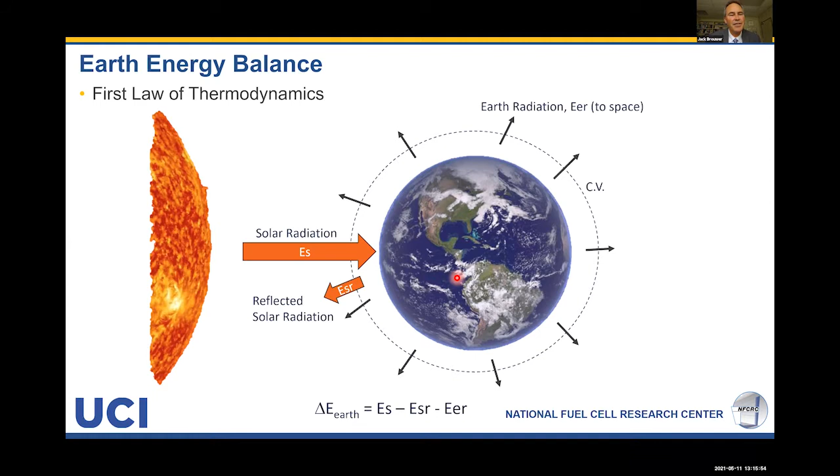I rather want you to think about something else, for the moment at least. And that is to think about our primary energy sources on Earth, which, except for nuclear, all come from the power of the sun. As a matter of fact, the fossil fuels that we use have been naturally produced on Earth from dead plant and animal life, heat and pressure over millions to hundreds of millions of years to produce these fossil fuels, which are precious and high energy density and enable us to, with very little effort, engender incredible things like flight over thousands of miles.

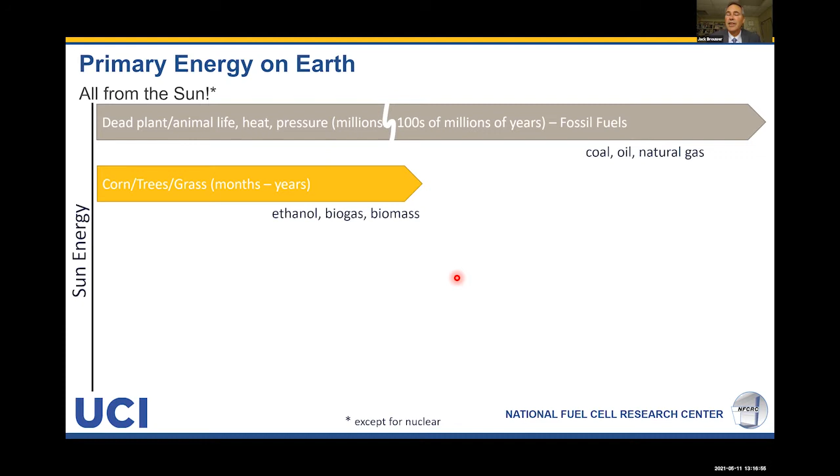But this is such a long time scale that we must draw a hash through this, because every other form of primary energy on Earth is so much more quickly replenished. And you think about things like biomass and biogas, things like corn, trees, and grass, which only take months to years for the power of the sun to naturally replenish them on Earth.

Or hydropower, again, power of the sun that evaporates the waters, forms clouds, the clouds move over the land, and the clouds rain out water into lakes, and we can use that as a form of energy or energy storage. Wind.

Wind is driven also by the power of the sun, creating temperature gradients that lead to pressure gradients that lead to wind forces. And then we have solar power, which the instant you use a unit of it up, another instant comes right back at you.

And so you can see that the primary energy on Earth all comes from the sun. So I want to suggest one partial definition of sustainability is to consider requiring conversion of these primary energy resources at the same rate at which they are naturally replenished on Earth, without externalities.

So I suggest if we started using much, much less of these fossil fuels, it could be sustainable. But this is a very long time scale. Inevitably, we must go to these more quickly replenished forms of primary energy.

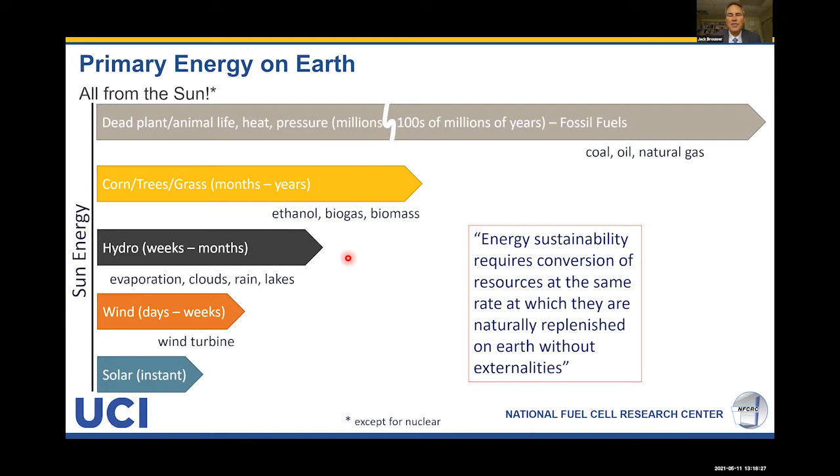But if you think about this, our current practices are so obviously not sustainable, borrowing from future generations, using these precious fossil resources almost as a delta function in the course of human history. It's quite obviously not sustainable.

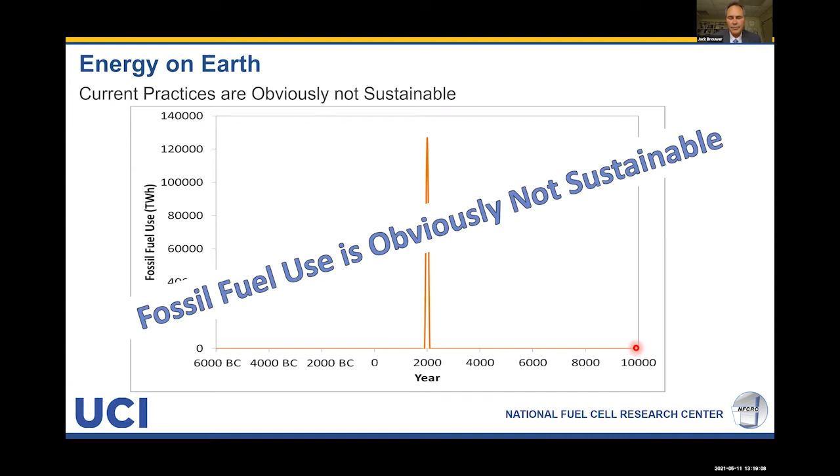In addition, we have externalities. It's not just that it's not sustainable from an energy conservation perspective, but the energy conversion technologies that have improved our quality of life—improving our healthcare, improving our transport, giving us freedom of mobility all around the world—these same technologies have unfortunately also been the most significant cause of environmental and geopolitical problems.

These are the things I want to call externalities today, although I hope we can get away from that and always consider these things when we look toward energy conversion in the future.

One of those, which has been historically a major point of concern from policymakers and the general public, has been criteria pollutant emissions. Most everyone from every political stripe cares about pollution. We don't want it. It's what leads to very serious air quality and health consequences, even in the most sophisticated and wealthy of economies. You see this everywhere around the world, even with very strict attention to pollution and even with all the money you want to spend.

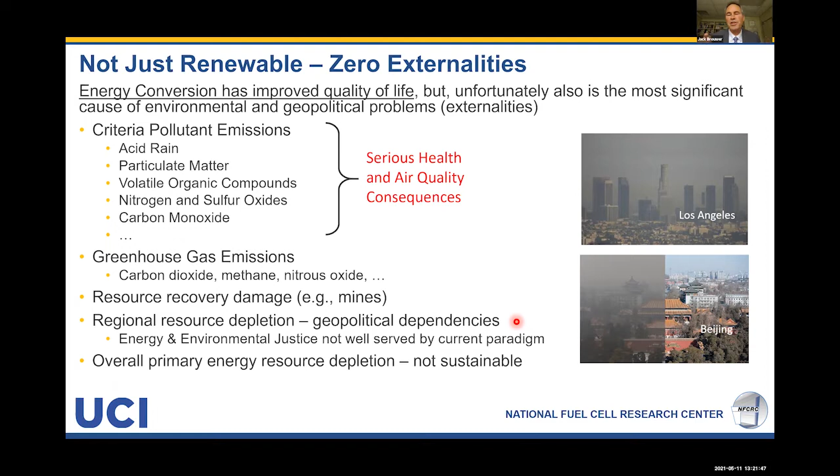We have additional externalities that many people aren't too concerned about today, but I am, and I think all of us should be: the resource recovery damage that occurs in things like mines, the regional resource depletion—the fossil resources we depend upon are not equally dispersed among nations or regions. This leads to geopolitical dependencies and energy environmental justice issues that are not well served by our current paradigm. I suggest the renewable paradigm can be better in this regard. And we have overall primary energy resource depletion, that delta function I showed earlier.

So the good news is that solar and wind power and battery costs have dramatically fallen over recent decades. And this is not by accident. It has been due to some of the policies that have supported their adoption over time, which now have led to their lower cost than other forms of energy in many jurisdictions.

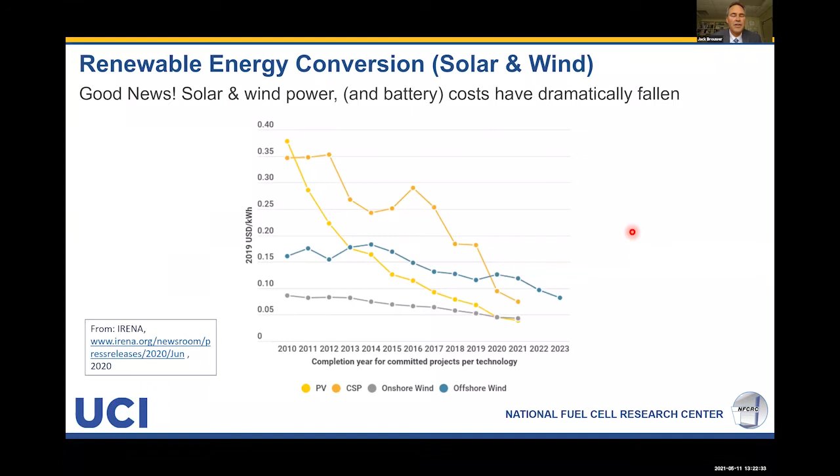And so this is a wonderful thing, something that changes our thinking a little bit, enabling us to think that we can, in the end, get our primary energy from sources that are more rapidly replaced and replenished naturally on Earth.

And this has led me and many others, maybe many of you, and the general public to think that we can get 100% of our energy from renewables, especially in power generation. And then if we would just electrify all the end uses and use batteries to handle the intermittency on the grid, and for some end uses, that maybe that's the whole solution.

We see our neighbor adopting solar on the roof, or we adopt solar and a battery in our garage and we have a battery electric vehicle. It's starting to look like, hey, if we just all did that, wouldn't that be enough?

And then we have some people who argue that hydrogen and fuel cells should not be adopted. They argue that it shouldn't be because it's mostly made from fossil fuels today, natural gas. They also argue that making hydrogen from water and electricity is less efficient than charging a battery, or that making electricity from hydrogen in a fuel cell is less efficient than a battery, so the round trip efficiency is lower, and that hydrogen is difficult to store and move around in society.

These arguments are being made by a lot of people, and by some who are extremely influential, like Elon Musk. I highly admire him and most of his practices and businesses, and I hope we have many more of them. But I want to suggest that even though I agree with most of this, he and others are being subtly untruthful and not telling the whole story when they argue against hydrogen and fuel cells.

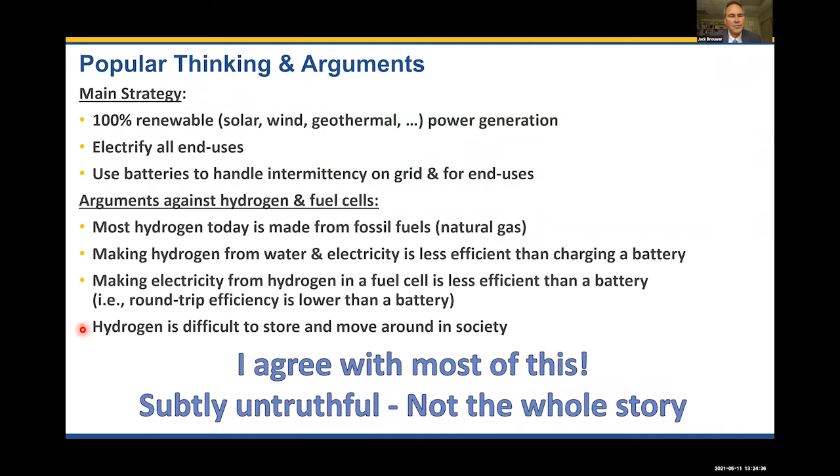That is because we cannot electrify all end uses. We can also use batteries, and we should use them extensively to handle intermittency on the grid, but they can't handle all the intermittency, only some of it. And not all end uses are amenable to batteries.

In addition, round-trip efficiency is greater for a battery unless you want to store energy for a long period of time. Then we can have higher efficiency with hydrogen energy storage. Hydrogen is difficult to store and move around in society, but that's compared to fossil fuels. It's easier than batteries.

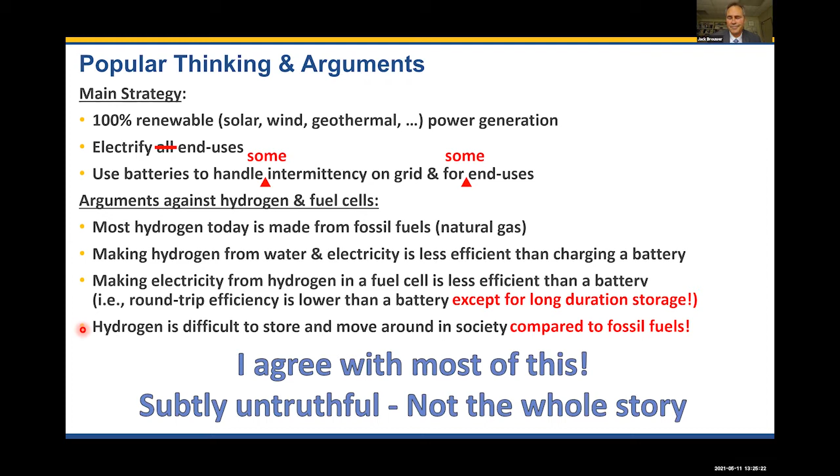I'd like to go into a little bit of our research that we have accomplished to see where and how we might best need and use hydrogen to enable this 100% renewable and zero emissions future.

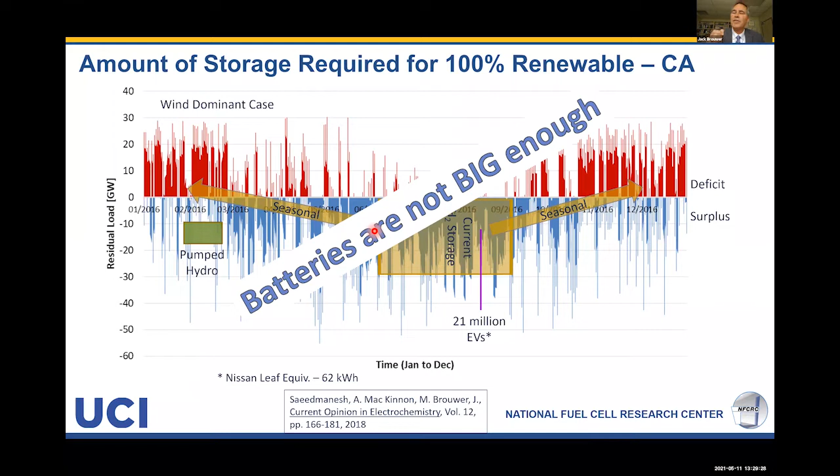Batteries, I suggest, can be used for short duration storage, but aren't sufficient. They aren't big enough for this requirement.

We did a similar simulation for the entire world. Instead of just California, we looked at the dynamics of sun and wind power in all the regions of the world, focusing on various continents, attributing a certain solar and wind contribution to each region. In Africa, it was mostly solar. In Asia, it's a 50-50 mix. In Oceania, 50-50 mix. In Europe, mostly wind. Anyways, we did an annual simulation of all the dynamics of sun and wind power.

We figured out that to make it through the year, we would need more than 20 terawatt hours, 20,000 terawatt hours of energy storage. This is a massive amount.

And if you ever tried to meet that energy storage with only the very best batteries that we make today, lithium-ion batteries, it would require more than 3,000 megatons of lithium and more than 25,800 megatons of cobalt.

From the US Geological Survey, we know that we only have 53 megatons of lithium resources all around the world, and only 25 megatons of cobalt, unless we want to mine the ocean floor, then we have another 120 megatons. But these are orders of magnitude less than we need if we were to make just one lithium-ion battery to store this amount of renewable energy.

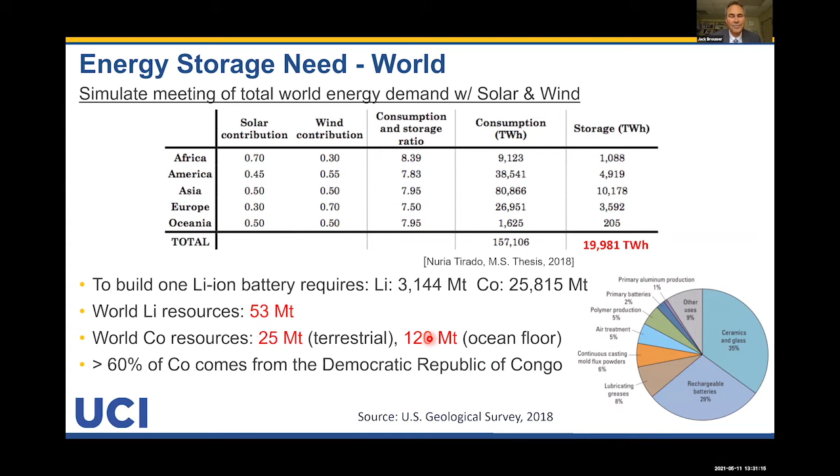So I want to suggest that lithium and cobalt, and these beautiful lithium-ion batteries, should be used where they make more sense: in our electronic devices, in cars, and in various applications that require smaller amounts and shorter duration energy storage.

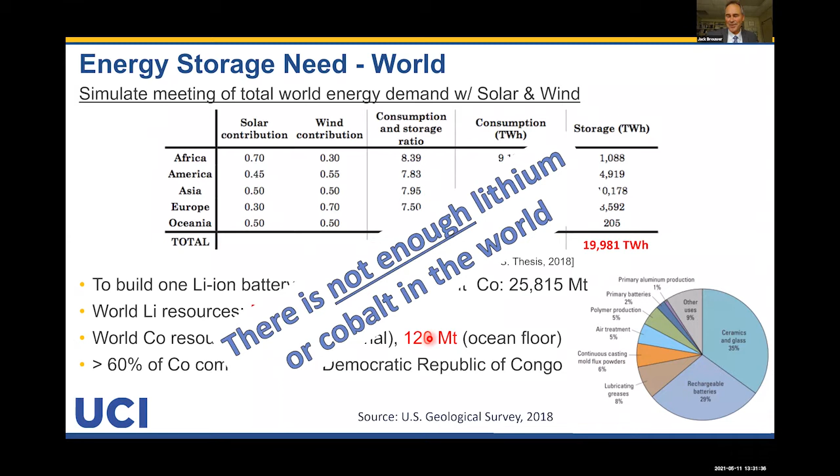So capacity factor is the number of hours that the battery is either being charged or discharged divided by the total number of hours. If you charge a battery and discharge it every day, it has a high capacity factor. If you charge it one day, leave it for a week, and then discharge it, it has a low capacity factor.

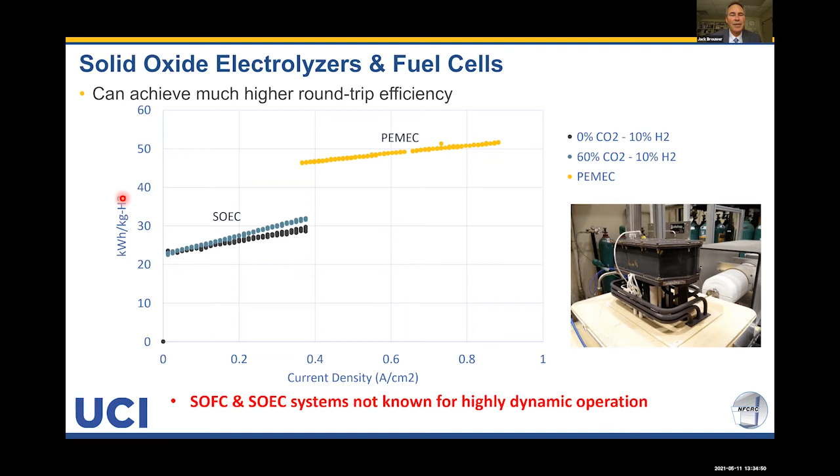However, these systems are not known for their highly dynamic operation, which is something that I've been emphasizing to this point. I want to spend a little bit of time talking about that as we go forward.

We have been able to, with funding from so many different entities and with awesome postdoctoral researchers and graduate students, develop this idea for building dynamic models of all types of fuel cells, electrolyzers, battery energy storage systems. The key simplification I suggest for enabling us to do these dynamic simulations over long periods of time, like a year, is to have limited geometric resolution.

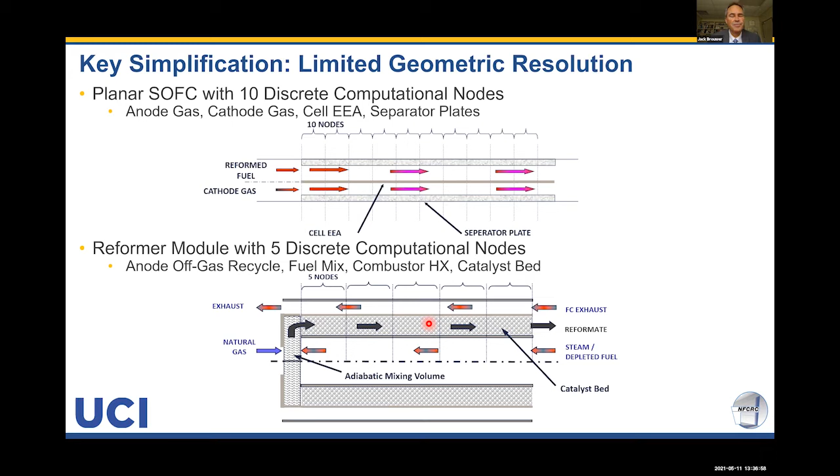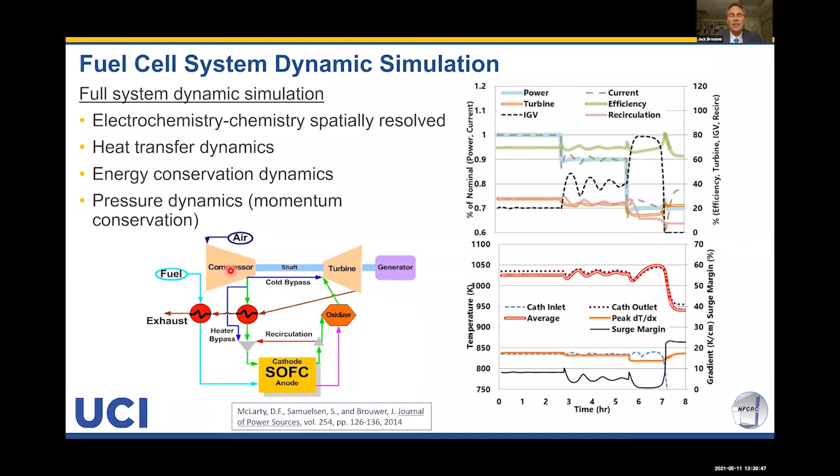We can not only simulate solid oxide fuel cells, but also solid oxide electrolysis systems. These have very interesting thermodynamics that I want to spend just one moment talking about, because one of the reasons that you can get higher electrical efficiency with solid oxide electrolysis is associated just with the simple thermodynamics.

But you also have these interesting things that affect the dynamics. We can operate at the thermoneutral voltage, often called VTN, where there is no net heating nor any net cooling required. In other words, the overpotential or electrochemical losses are applied to this heat demand exactly to balance out the heat required for the given current density.

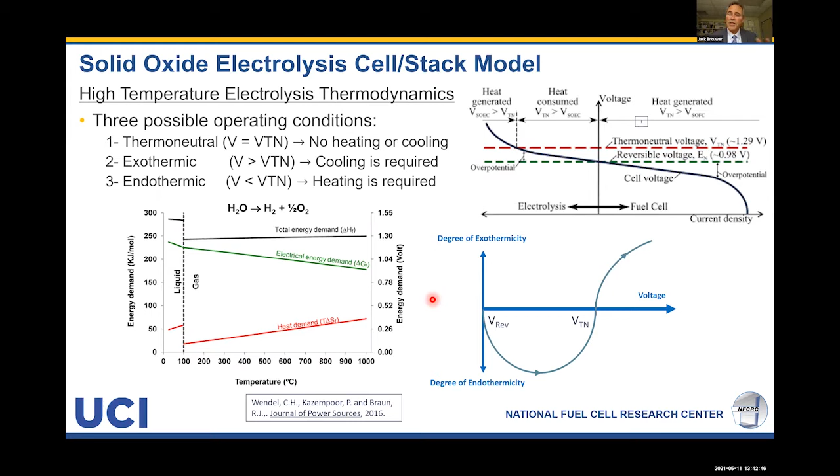And then, after we cross the thermoneutral voltage, we go into an exothermic region. Now interestingly, most existing electrolysis systems, since they have higher activation losses, don't have this dynamic associated with them. They tend to have high electrochemical losses, putting them above the thermoneutral voltage immediately when they go into electrolysis mode. So with this in mind, let's see if we can actually model solid oxide electrolysis cells and stacks.

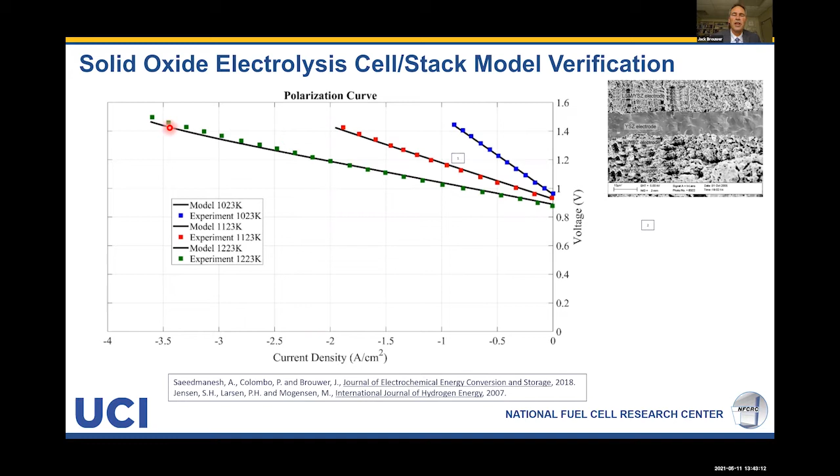We've verified that our model can do well against literature data for various temperature conditions, and you can see here our model compared to literature data for different temperatures. As you would expect, at higher temperatures you have lower ohmic losses, and as a result you have a flatter polarization curve.

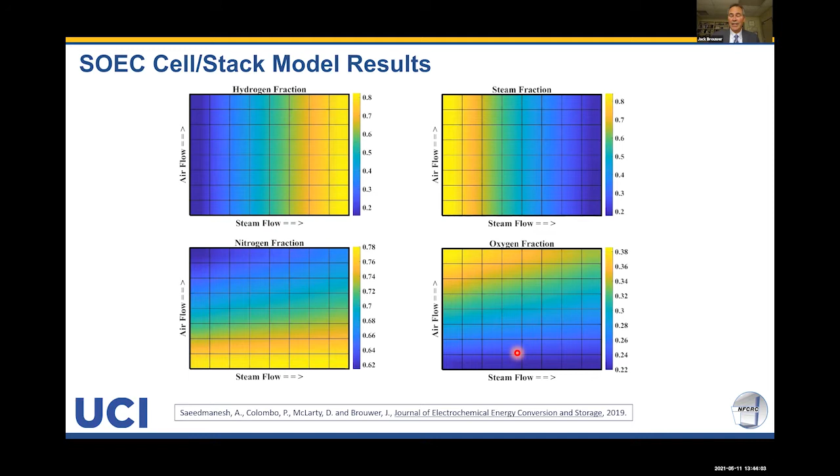We also can resolve, very importantly, the species concentrations, as you're seeing here, and the temperature distribution for all of these systems as they are operating dynamically. And then we can put a system around that, we can wrap a system around that solid oxide electrolysis cell, and we can simulate those too, sometimes with spatial resolution, sometimes not.

So for example, our ejector and valve models tend to be not dynamic, but rather simple bulk models. But for the heat exchangers, the air blower, and all of those systems that might have important dynamics, we resolve all of those.

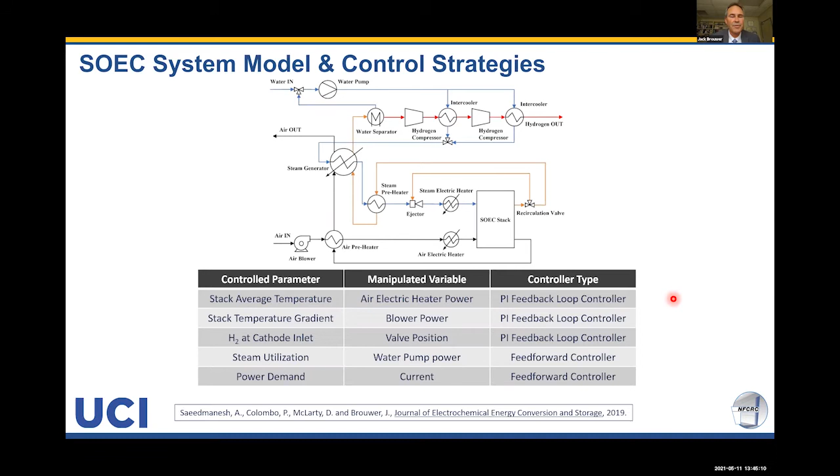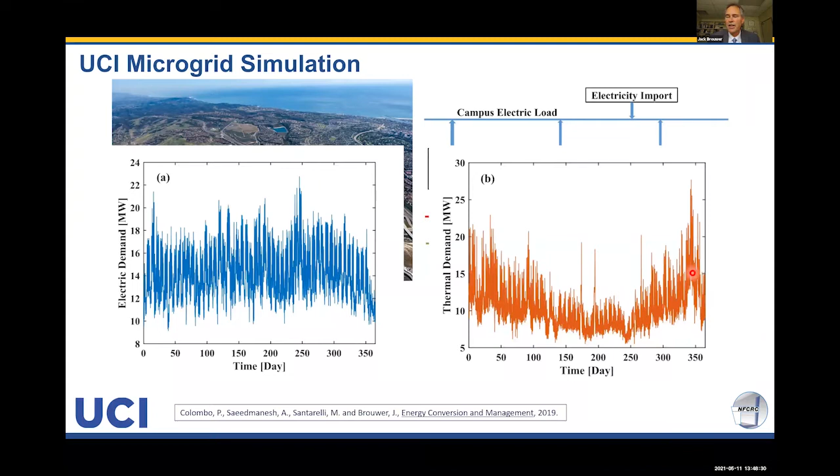Now, curtailment's not necessarily a bad thing. It's one of the cheapest ways to actually get a higher renewable percentage and just toss a little bit of the renewable energy away. But as we add more and more solar and wind power onto the grid, we're going to be increasingly forced to store that renewable electricity.

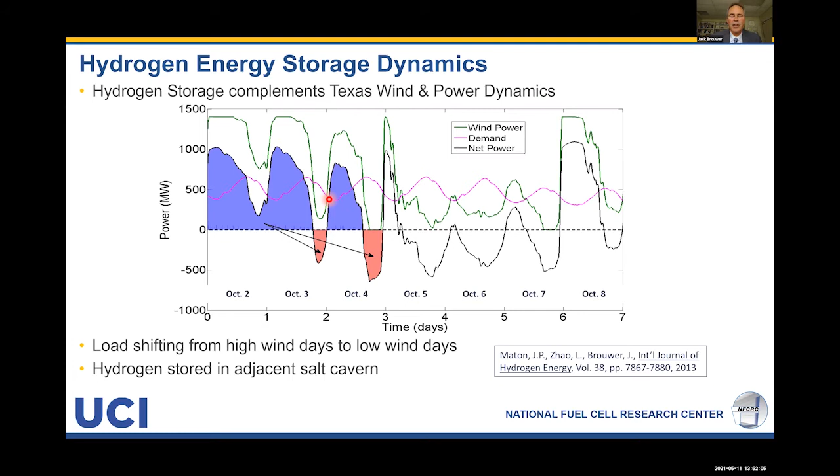Now, when we did this, there were no operating hydrogen storage salt caverns, but now there are 2 currently in operation in Texas, and they're proving that this is a safe and very effective way to store renewable hydrogen. But what if we don't have a salt cavern?

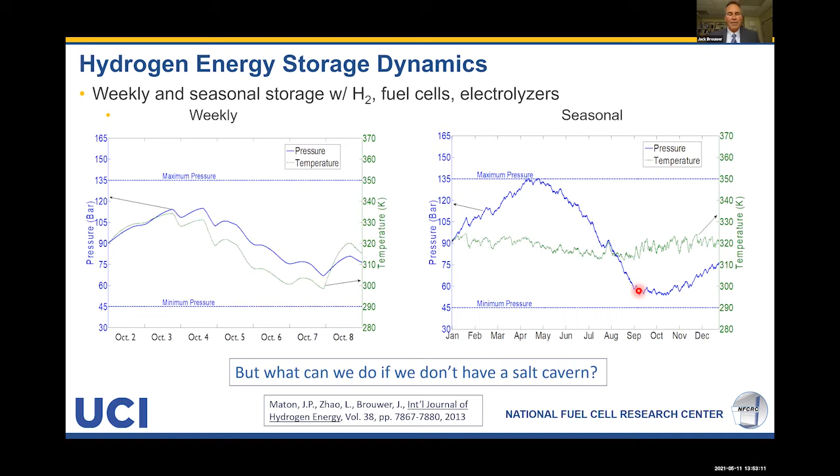Well, in California, we don't have one. But I suggest we could use the natural gas system, another underground storage resource that could not only provide that storage, but also deliver that renewable energy content, and it can do so with very high reliability.

The Gas Technology Institute, very close by to UIUC—well, Chicago is pretty nearby—has estimated 99.999% available gas delivery to customers. This makes it a very interesting resource for our renewable energy future.

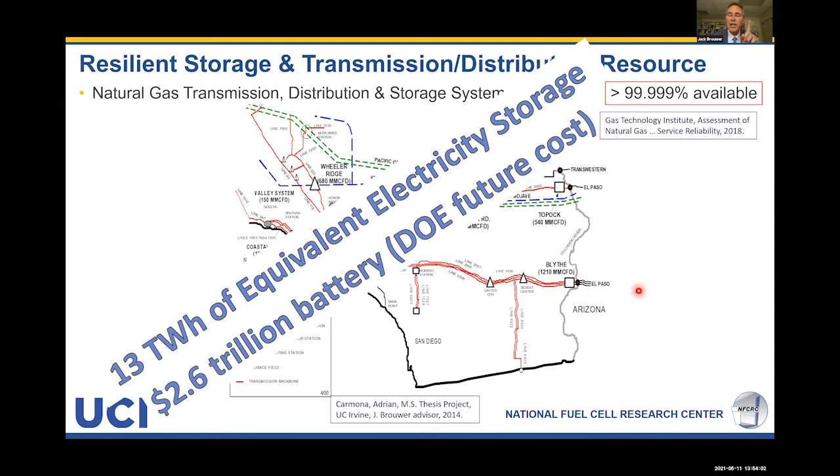It would provide, just in Southern California, 13 terawatt hours of equivalent electricity storage. That's $2.6 trillion value with regard to DOE future battery costs. Even if we just put 5% hydrogen into the natural gas system, it would be $130 billion at future battery costs. Now, these numbers are so big, I want to relate them to something we understand a little better.

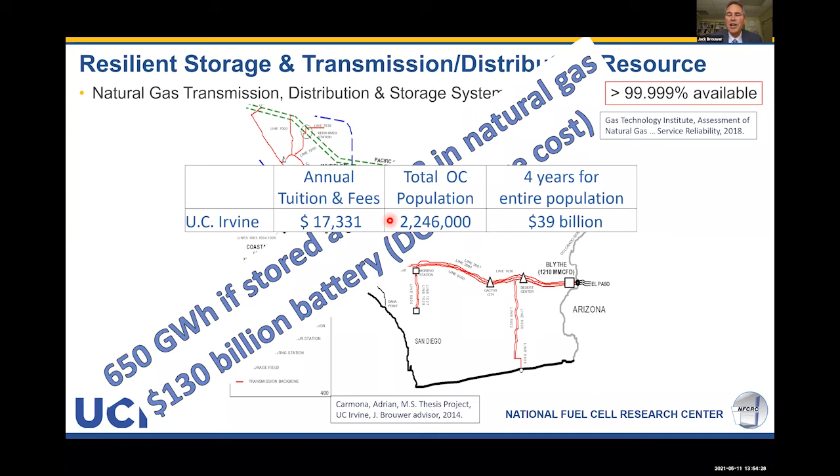How about UC Irvine tuition and fees? We could send the entire population of Orange County, every man, woman, and child, to 4 years at UCI for only $39 billion. We could make all University of California schools free for 4 years for the entire UC population for only $4.7 billion. The interest alone off of this massive energy storage system's value could make all UC schools free forever.

We've got to realize how big this resource is and why it will be so valuable to our energy future. It's been proven resilient under all sorts of circumstances: blackouts, winter storms, hurricanes, earthquakes, Japanese super typhoons, the Napa fire—all kinds of fuel cell and gas delivery underground circumstances. It's such a massive resource.

I wanted to have this idea in your head. Think about this, because we could first mix hydrogen up to a certain percentage into this system. This isn't such a great thing with regard to decarbonization of the gas system itself, because we can only go up to 5 to 20%. The biggest reason we want to do this is so we can add more renewables to the electric grid. That's why we want to do it at a certain percentage.

And then I think we've got to piecewise convert it to pure hydrogen or a renewable hydrogen derivative. I asked one of my PhD students to think about, hey, what if we put solar in the desert here and didn't build any transmission lines? We just wanted to use the gas system to move that energy. This area shown is 20 miles by 20 miles.

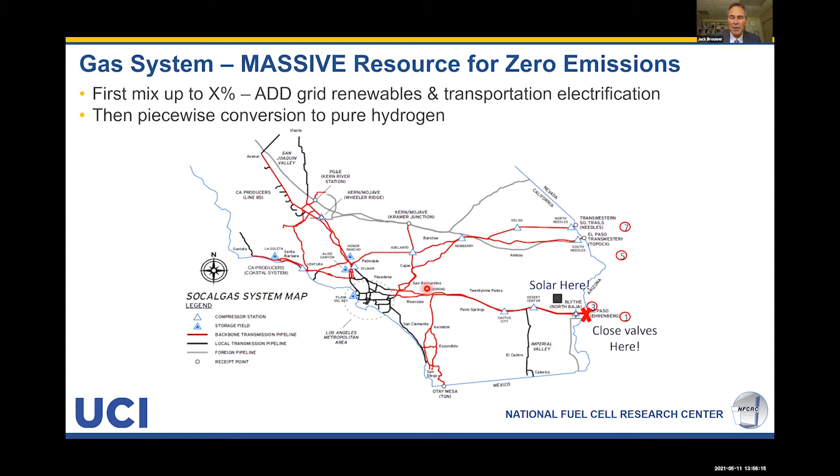And just this one project could produce 40% of all of our electricity. And it does the transmission and distribution for us as well. This is pretty remarkable to think about, right? One 20 by 20 mile square project, just using the gas system for hydrogen, takes California from its current 35% renewable to 75% renewable.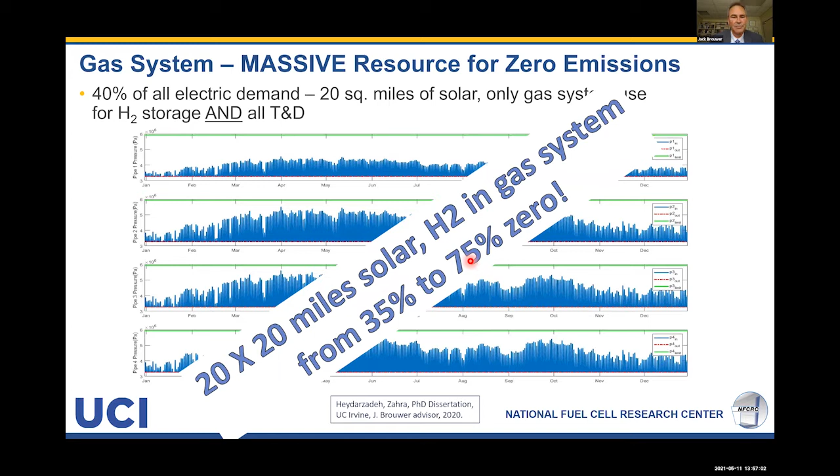I want to end pretty soon here with why I think we need hydrogen. And I want to suggest I'm not the only person that knows this. I was very fortunate to work with a whole group of amazing scientists and engineers led by my close colleague, Steve Davis, to investigate completely zero emissions energy systems of the future. You can see there's a lot of things that are going to be required, not just electrification and batteries and sun and wind power. We have chemicals and hydrogen, and we need something to make ammonia, to fly, and to make cement and steel and reliable electricity.

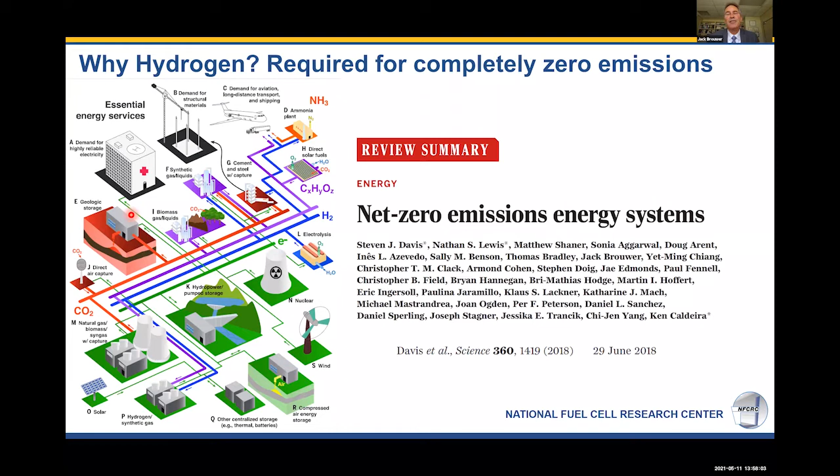These kinds of things are increasingly being recognized as possibly requiring hydrogen for achieving completely zero emissions. Especially in the transport sectors, there are some things where anything that requires rapid fueling, long range, or large payload is going to need a zero emissions fuel. Batteries don't do well in these circumstances. Hydrogen and its derivatives may.

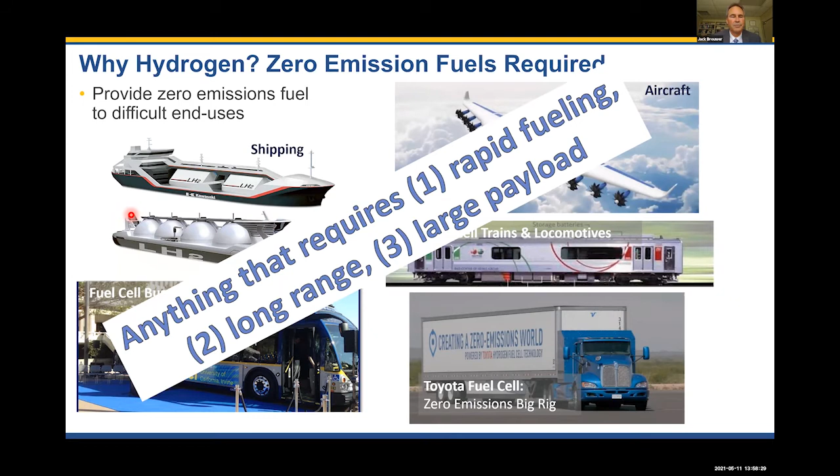Hydrogen is also required for industry. Many applications for heat or feedstock cannot be electrified. You look at things like steel making, cement production, plastics, ammonia and fertilizer production, computer chip manufacturing, pharmaceuticals, and other things will require something like hydrogen and its derivatives to make them zero emissions.

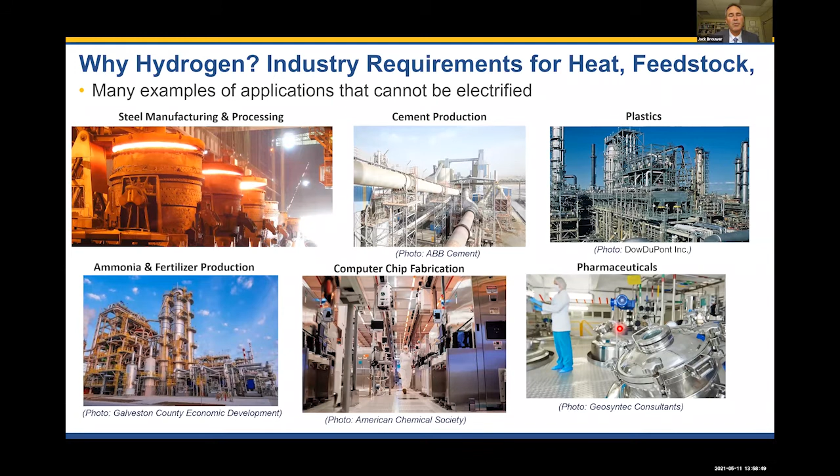Okay, I'm going to end with just 2 Gedanken experiments very quickly—thought experiments, after Einstein's naming of such. You just think about something you'd like to have happen in the future and then do some high-level analysis of that. One of those analyses I'd like you to think about is: can we ever make the LA Long Beach port complex completely zero emissions?

There are 2 technologies people are suggesting for this purpose. One is battery energy storage systems, shown in the red data on this plot. The other is hydrogen, with gaseous shown in green and liquid hydrogen options in blue. What I'm showing here is the percentage of original cargo space and net tonnage on ships of various sizes. TEU refers to the 20-foot equivalent units—a container size typically used for the size class of ships.

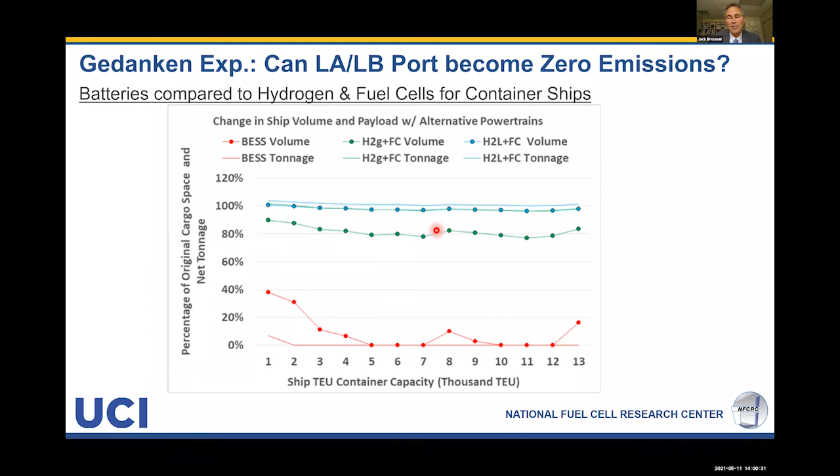What you can see here, it's pretty obvious that hydrogen options, especially the liquid hydrogen options, can almost retain 100% of the tonnage and volume. Whereas battery electric energy storage systems, at best, can only support 40% of the original volume, and only about 8% in the smallest size classes of these ships. Of course, with gaseous hydrogen storage, we lose almost 20% of the volume here because that takes up a lot more volume compared to diesel.

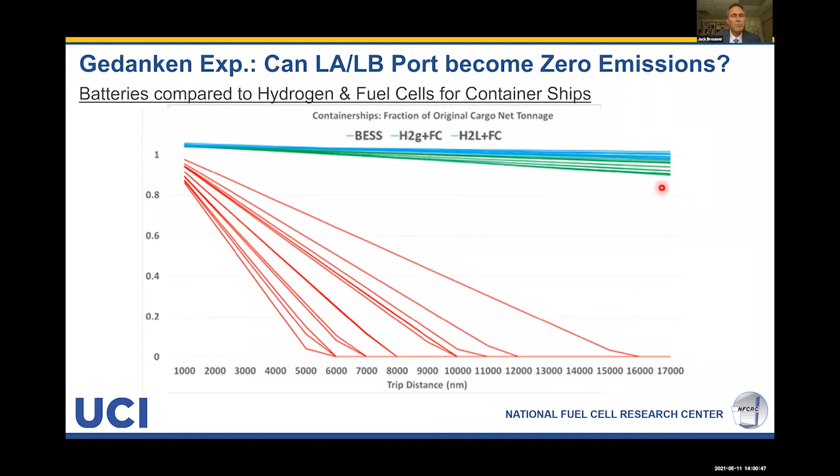And we know that these hydrogen options can go long distances. So you can see here, 17,000 nautical miles, and they still can carry between 100% and 90% of the original cargo, but the battery energy storage systems can't make it over these distances.

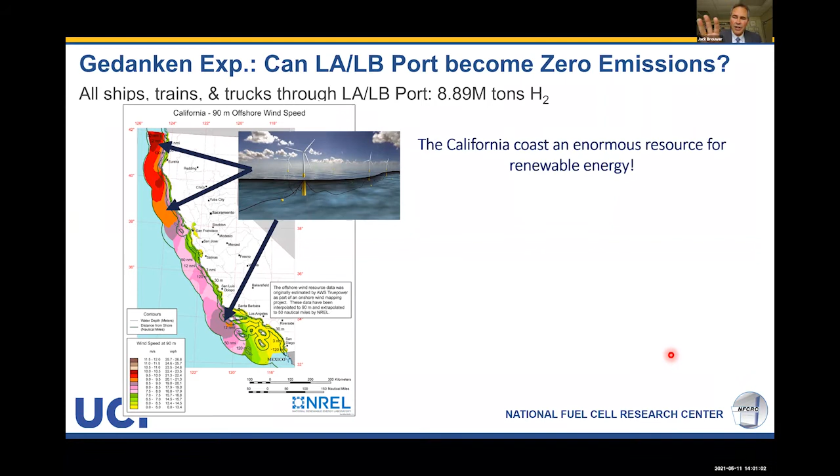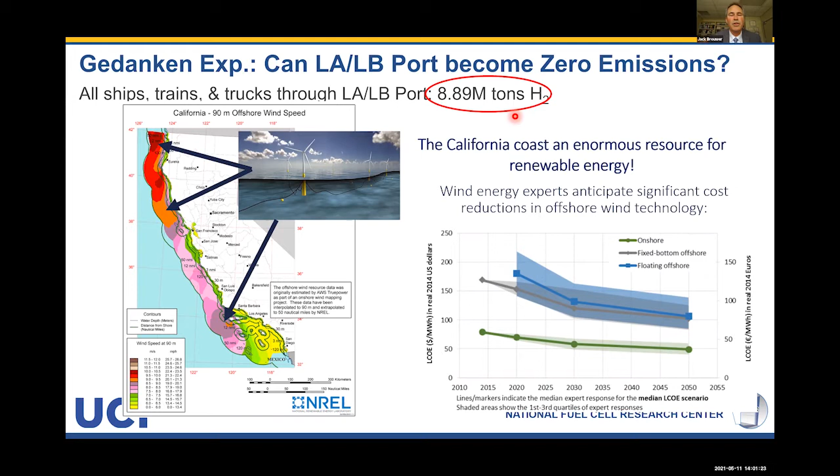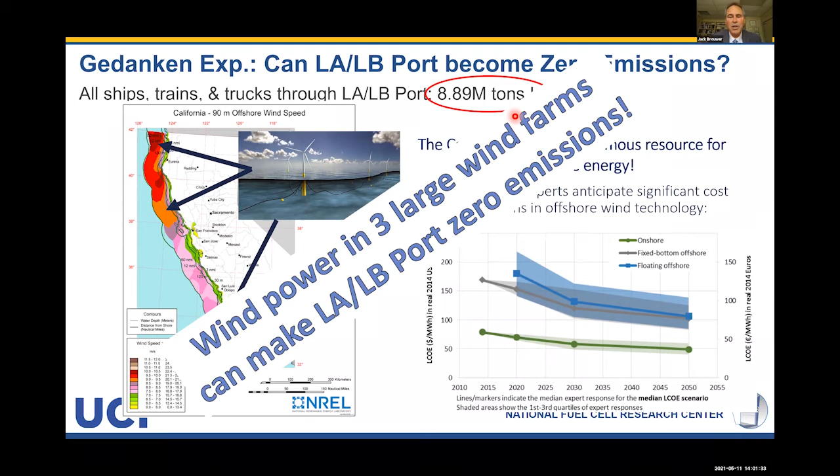And then we wonder, can we make all that hydrogen? So we've looked at various options for making all this hydrogen, and we simulated just three offshore wind platforms. With just those 3 offshore wind platforms, we can make 8.9 million tons per year of this renewable hydrogen. This would enable us to decarbonize all the ships going into the port, all the trucks going into the port, and all the trains going in and out of the port, and to electrify the short range options. Just wind power in 3 large wind farms can make the entire port complex of LA Long Beach zero emissions. How about another Gedanken experiment?

We've been fortunate to work with Microsoft over many years to think about how we can make data centers zero emissions. We've simulated cases of battery energy storage, power to gas complementing solar and wind, or even cases that make hydrogen out of all the renewable power and use fuel cells directly to power all of the servers. We've looked at many different locations.

We're accounting for self-discharge and round trip efficiency for the battery energy storage systems too. We can optimize this for various things. We can optimize for the most data going directly to the data center, and get 81% - that's pretty good. With a 50-50 mix of wind and solar, we could also minimize the storage amount required, which would need more solar and less wind. We can have the lowest energy capacity installed, which would require mostly wind in this particular Wyoming location.

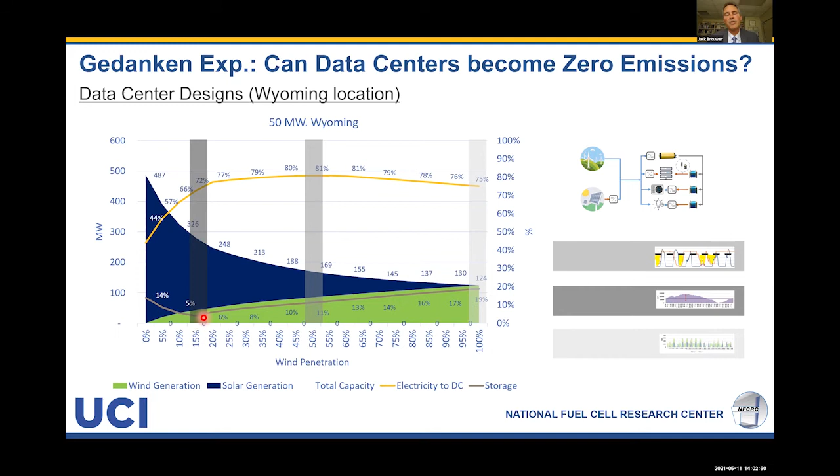We've also done techno-economic analysis of these cases, and every single case we've simulated so far, even accounting for all the costs of liquefaction, storage, and boil-off losses, has led to a substantially lower cost of energy going to the data center in a hydrogen storage case compared to a battery energy storage case. This is primarily because we require seasonal storage to make it reliable for the whole year, and that leads to a huge battery cost, even though we can install less solar and wind because it's more efficient.

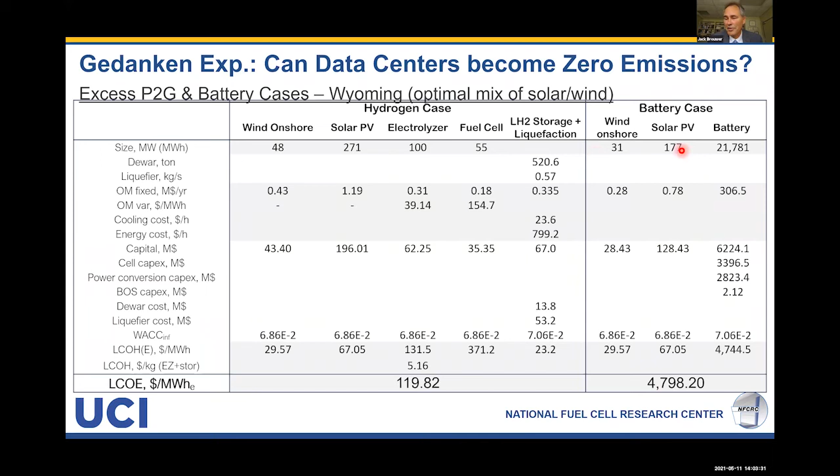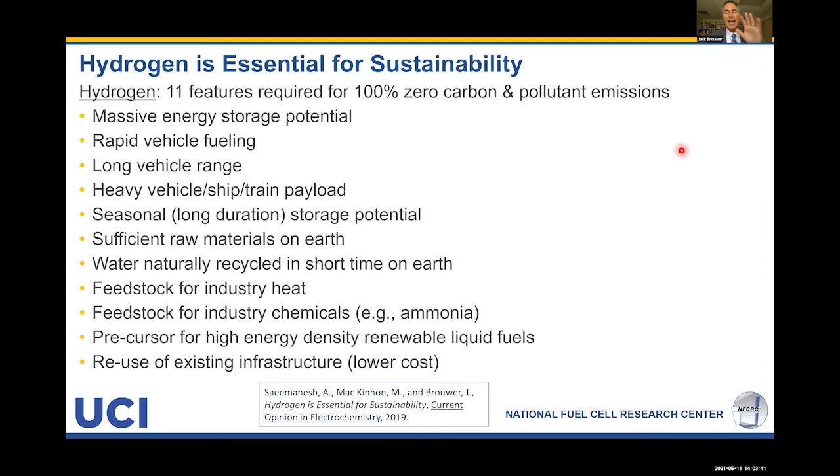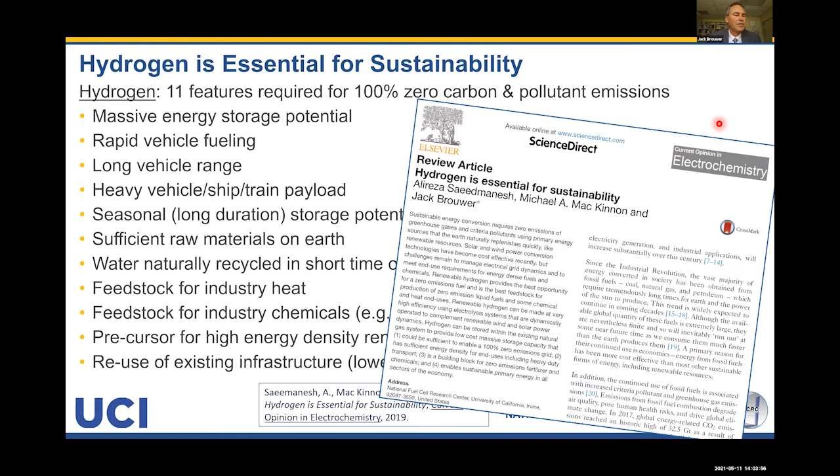Every case is cheaper in the hydrogen case. Now, I haven't been able to discuss every single aspect of hydrogen that I think makes it essential for sustainability, but we wrote a paper on this, published in the journal Current Opinion in Electrochemistry a couple years ago. I hope you get a chance to look at that afterwards and see if you have anything you want to argue with me about. I'd be happy to discuss that.

So in summary, we must and we will inevitably increasingly depend upon solar power and its more direct derivatives to engender air quality, greenhouse gas emissions and climate, energy, environment, and geopolitical sustainability. It will also help us, if we're careful, to address environmental justice.

However, the dynamics of such a future are challenging. They are going to require complementary dispatch and massive storage and seasonal storage. For that, we need all of these technologies: batteries, hydro, power to gas, hydrogen energy storage. This is very important for engendering our zero emissions future.

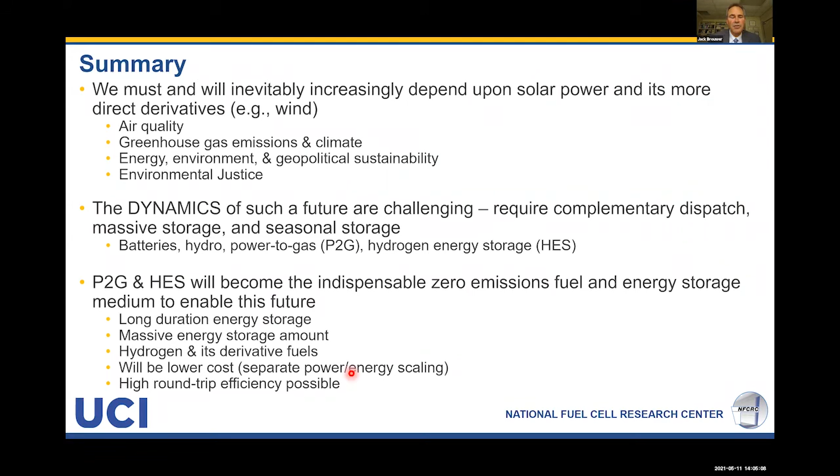I want to suggest that the one that has been ignored the most up to this point, but is increasingly garnering attention, is power to gas and hydrogen energy storage. I think they're going to be indispensable to our zero emissions future because of some of the features I hope I've been able to convince you of today.

So, do we really need hydrogen? I suggest absolutely. I don't think we can get to zero without it.